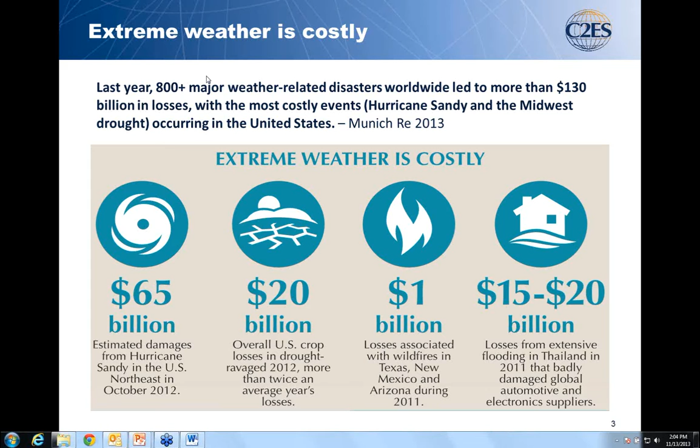The report, in addition to looking at what types of climate events cause a lot of problems, really tries to take the business perspective and answer the question: how do businesses perceive this risk, what are they doing to manage it, and are there opportunities they can seize by looking down the road at some of the impacts of climate change?

The report performs three types of analyses. One, a review of the global S&P 100 companies to look at any information they have publicly about climate risk and what they may be doing to manage it or seize opportunities. This information includes carbon disclosure project surveys, SEC 10K forms, and sustainability reports. In addition, we had more in-depth case studies with 6 companies, American Water being one of them, and held a workshop at the end of November 2012 to get companies' reactions and hear more directly from them.

If you haven't checked out the report, we have the website here on this page. I encourage you to do so.

Some other key findings: a lot of companies perceive risk as being important. 9 out of 10 of the 100 companies we looked at make some statements publicly that risk from climate and extreme weather is something they're worried about. However, a lot of them consider that risk to be managed within their normal business continuity plans—almost 3/4 gave that response in some form. A smaller portion are doing specific climate assessments, including future climate assessments, not just current climate, to think about their risk.

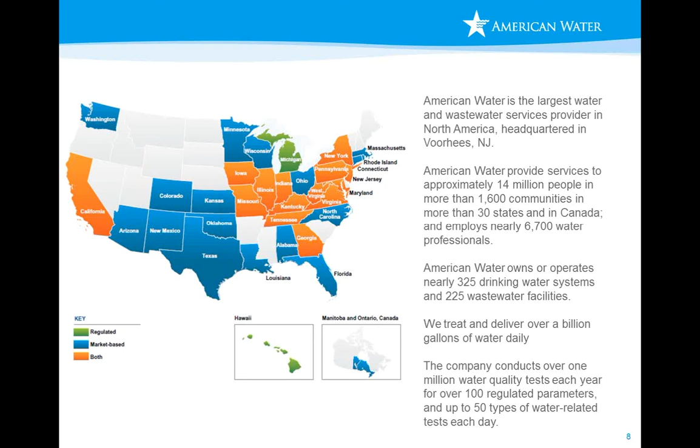From a climate standpoint, that poses a whole variety of different risks, and I'll show you a number of examples, from Superstorm Sandy to flooding in the Midwest and tornadoes. This isn't just a hypothetical or theoretical risk — it's very real for our company.

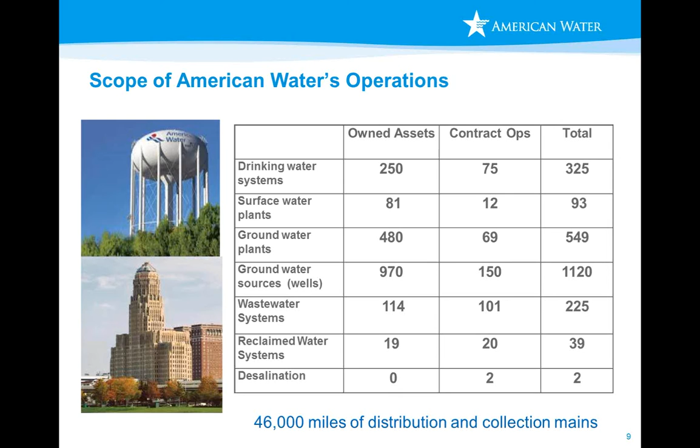We operate over 300 drinking water systems and 200 wastewater systems. We have over 1,000 wells. We also reclaim water, and we'll talk a little about the role of reclaimed water on climate change, as well as 2 desalination plants, and we're in the process of trying to build a 3rd. We'll touch a little on desalination.

A little bit on the outline of the presentation: I'll talk about climate change's effect on water utilities and some of the severe water events, and we'll touch on some of the adaptation that's already taken place. We'll end up talking about — and I'm not sure who to attribute this to, I've heard it in several different places — that in the end, climate change is really water change, and that's important.

I'll take a bit of a side trip around mitigation, and there's some discussion whether this is really appropriate. But I believe for a water utility — we're going to talk about water utilities being recipients of the effects of climate change, of drought, of flooding, yet they also have a role in contributing to that because they're large users of energy. So we'll talk about how we're managing energy and how that impact on water touches this water and energy nexus.

We'll talk mostly about adaptation — conservation, what we're doing on leak detection — but really get down to integrated water resource management. You'll see a number of different approaches towards climate resiliency, ending with the kind of program we use to assess our risks as a company.

This graph shows two things: the average water availability in the United States, and in the boxes, projected population growth. You can see that some of the areas of the highest growth rates, in the Southwest and in Florida, are also the areas where we're already seeing water stress.

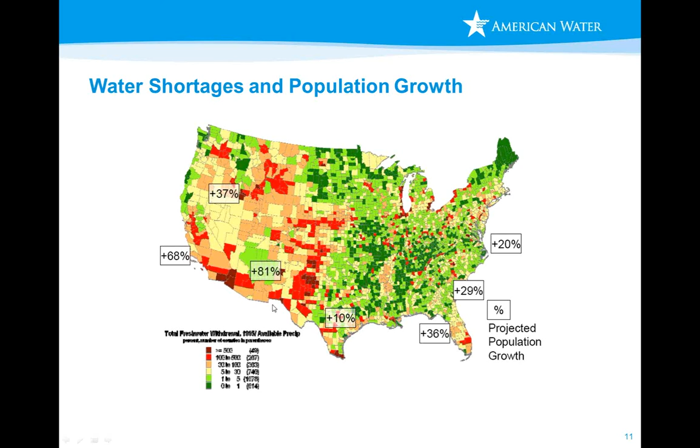But beyond those average water rainfalls, we really have to consider the variation in rainfall. As water utilities, we have to consider providing water services even when there's not an average year. We've seen in these graphs — the Southwest, Texas in particular — in 2011, and again in 2012, 60% of the counties in the United States were under drought conditions.

And again this year — this isn't just a bad year. Drought and water availability is a persistent problem for parts of the United States. So water utilities have to make plans on weathering the storm, as we may have to plan to weather floods or droughts for multiple years in a row.

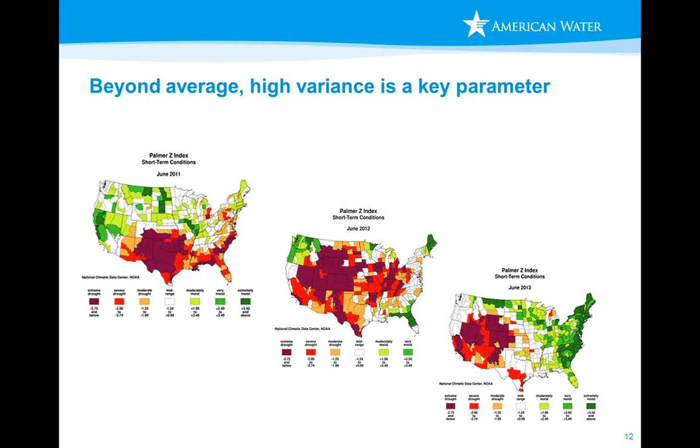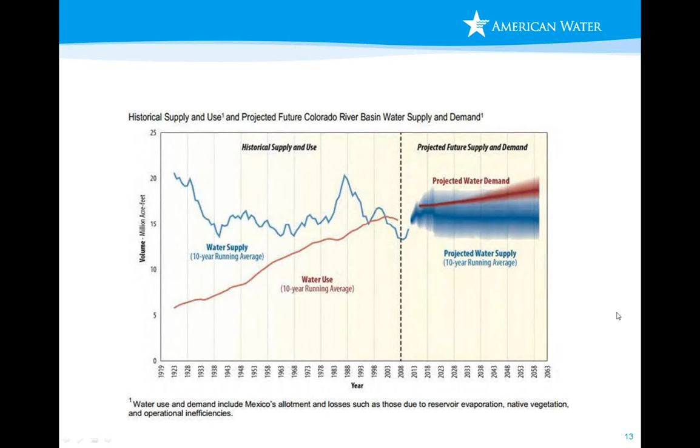We have a number of critical aquifers in New Jersey. Groundwater supplies as well as surface water supplies are increasingly becoming challenged.

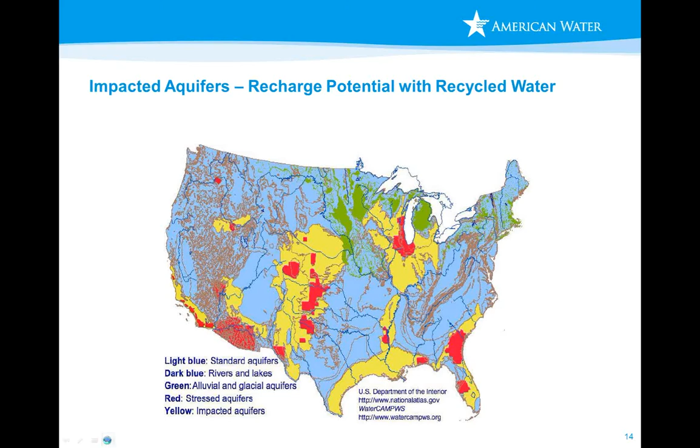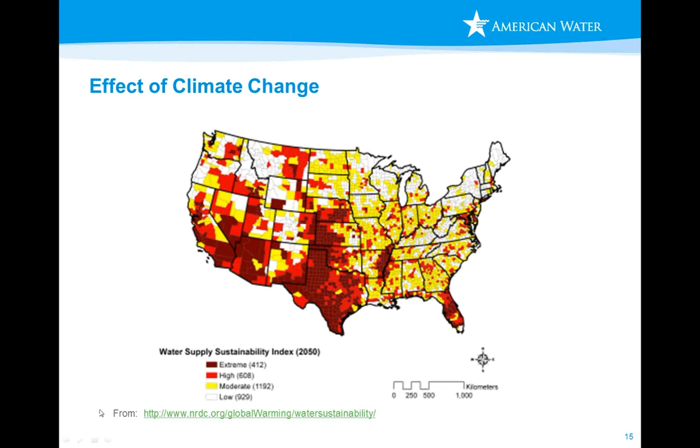Just in the last couple of years across American Water, we've experienced a number of extreme events: blizzards that shut down power supplies and threaten our ability to pump water, floods, droughts, storms, windstorms. My weather vocabulary has increased so much, from haboob to derecho windstorms to Superstorm Sandy, and we've gone from record drought to record flood in just a matter of 6 months.

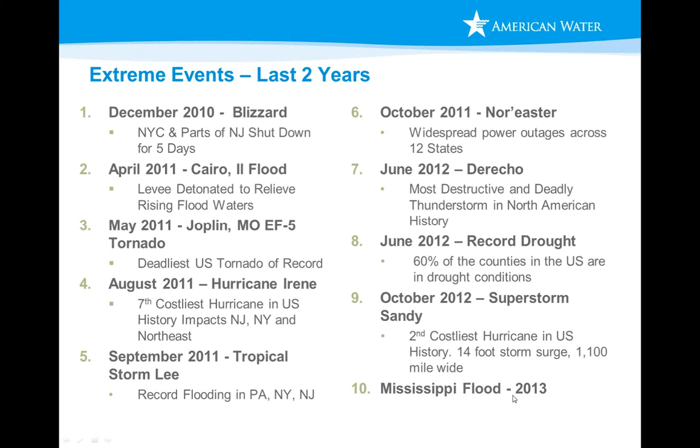Stepping back, my first experience with climate change and extreme events started in 1993 along the Mississippi River, where we had a treatment plant serving Alton, Illinois, just on the Illinois side north of St. Louis. This plant was along the river, and in '93 it was completely flooded, along with many other water utilities and wastewater systems up and down the Mississippi. Perhaps you remember Des Moines, Iowa was flooded for about a month before they got back into service.

Today we have a new treatment plant well up on the bluffs of the Mississippi, away from floodwaters, primarily driven by the fact that the old plant was in need of repairs and was constrained by having a railroad on one side and the flooding river on the other.

In more recent years, we had an effect from multiple storms: Hurricane Irene in August, followed by Tropical Storm Lee in September. This affected parts of Pennsylvania near Hershey. The previous record flood level was 16 feet, and the combination of these two storms resulted in flood levels 10 feet higher than previous records.

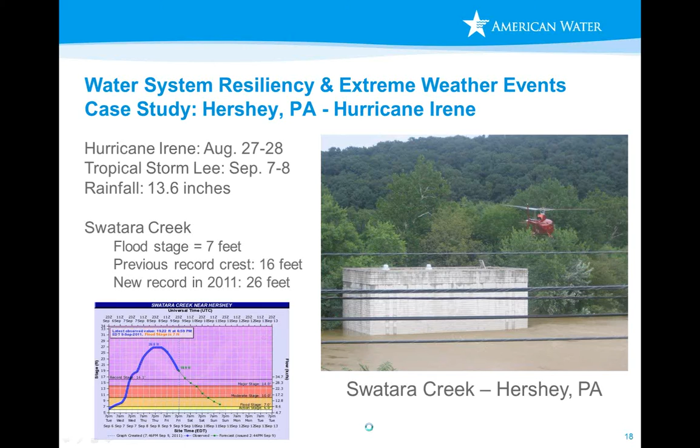The key was trying to find assets so we could disconnect houses no longer connected to the water system, shut down water in parts of the community affected by the tornado, so we could continue to provide service in other parts.

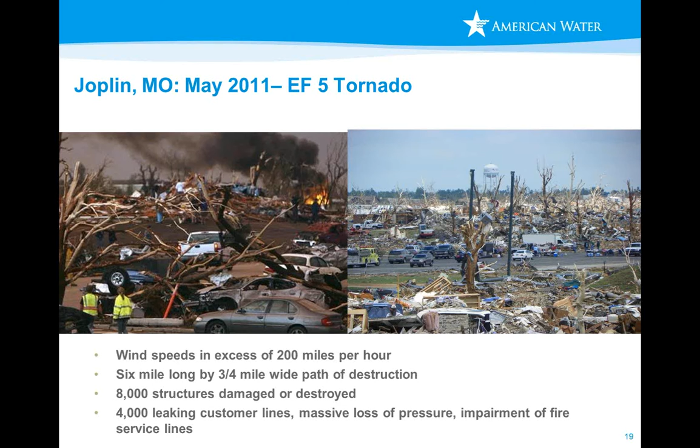But as we look at future weather challenges, we're actually looking to engineer this wall to be even higher.

And of course, Hurricane Sandy impacted the United States and some of the barrier islands we provide water service to. The ocean washed in and cut the island into multiple pieces, washing out roads, water and sewer lines, everything, such that parts of the community were completely devastated. Where we used to have water services, we now have water hydrants out in the middle of the ocean.

The key to our recovery was our recent investment in high accuracy GIS mapping of our assets, so we could go to a location covered with 3 or 4 feet of sand and accurately pinpoint exactly where a meter box was, so we could dig down and turn off the water to a house that no longer existed. It also allowed us to map the roads to allow crews to get in and begin rapid restoration of the community.

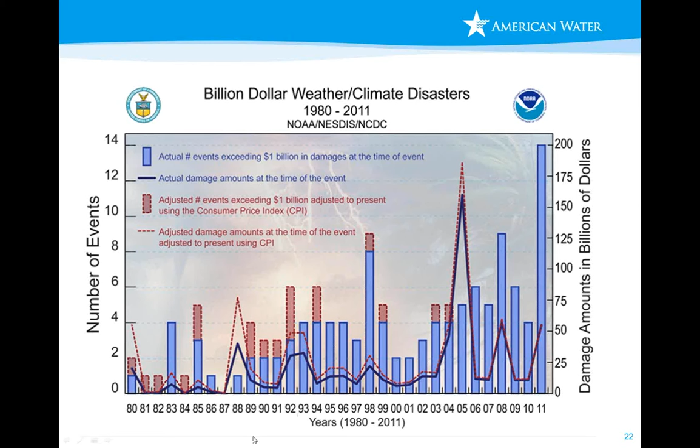The forecast for this, according to the National Association of Clean Water Agencies, is through 2050 another $500 billion in need for investment in climate adaptation costs for water systems. This comes on top of an already $1 trillion forecast over the next 20 years to improve water and wastewater infrastructure and upgrade aging facilities.

When we combine these two, there's tremendous pressure on water infrastructure, not only from aging assets but also from the challenges posed by climate change. The key to this is smart investment, such that investments made on aging infrastructure also make facilities more resilient to climate change.

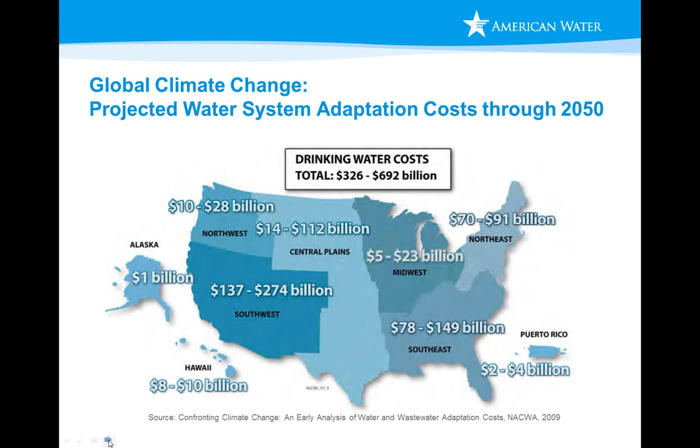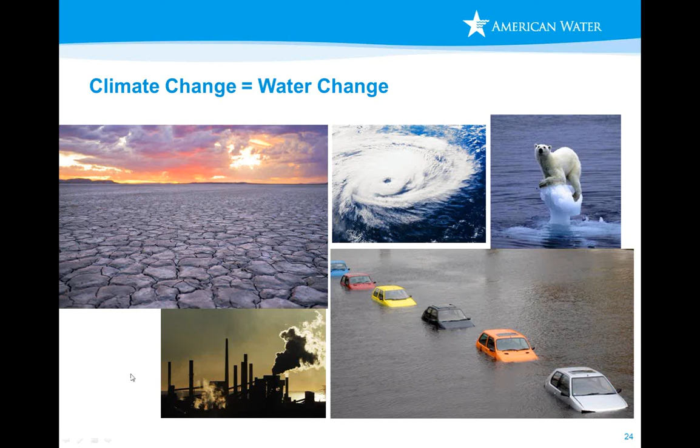By having that snowpack in the mountains, with a delay in melting, it essentially acts as a water reservoir. There are changing patterns in that, leading to flooding and pollution—not only of greenhouse gases, but pollution related to water supplies. That's really the idea here for this next slide.

One impact of climate change is water quality changes, and even when water is available, quality changes may make it unsuitable for drinking water. For example, forecasts around algal blooms due to high nutrient runoff from storm events, or reduced flow caused by droughts or higher temperatures, result in blooms of algal cells.

Even more concerning is that some of these algal cells can create toxins—neurotoxins that affect the brain and nervous system, and hepatotoxins that affect the liver.

There's increasing concern from a public health standpoint around climate change regarding these compounds being present in water, as well as clogging of water filters and changes in algal blooms that alter organic carbon levels, which could create disinfection byproducts posing health risks and promote bacterial growth in water supplies.

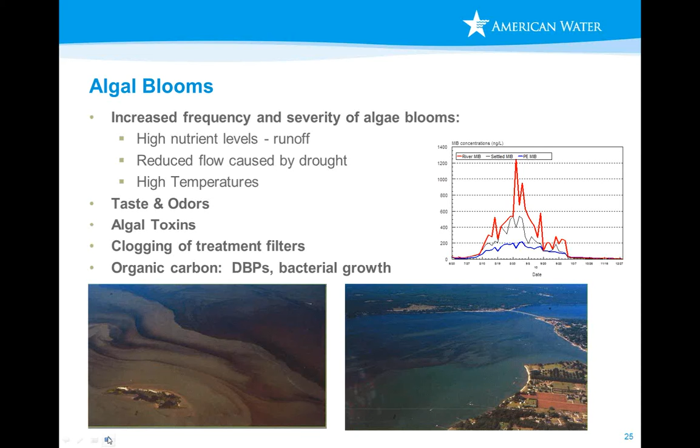So the rainfall that occurred 7 days ago has been shifted to align with the bacterial patterns occurring now. You can see that in many cases these peaks overlap with each other—so a rainfall event 7 days ago can be traced to the occurrence of bacteria in water supplies today.

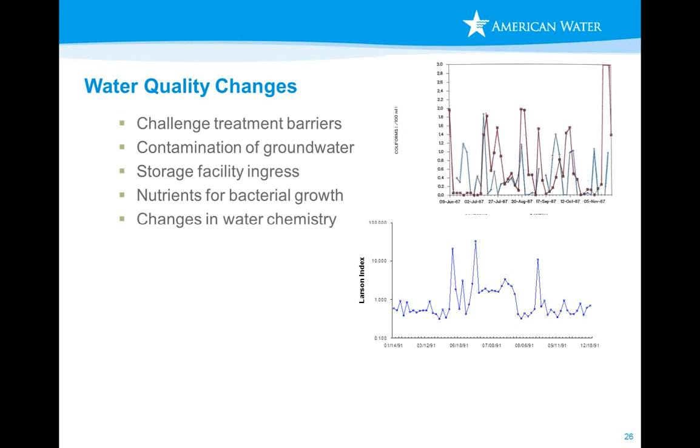So water quality changes and the potential for overwhelming treatment barriers are a very real concern for water utilities as we see these changing water patterns.

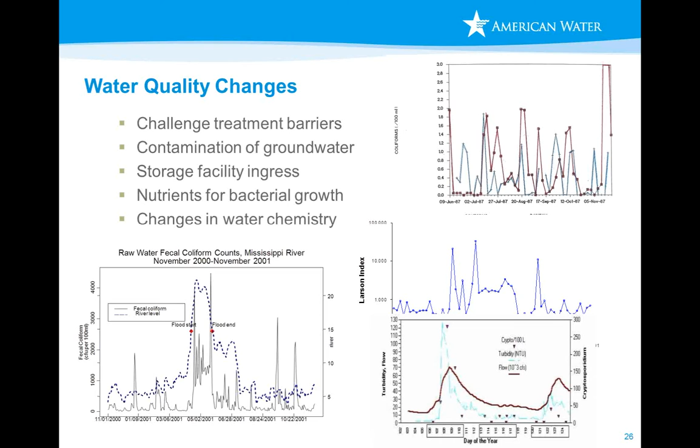It's not just that utilities are recipients of this, but water and wastewater utilities use about 4% of the nation's energy, contributing to greenhouse gases. In some parts of the country, like California, it's much higher, approaching 20%.

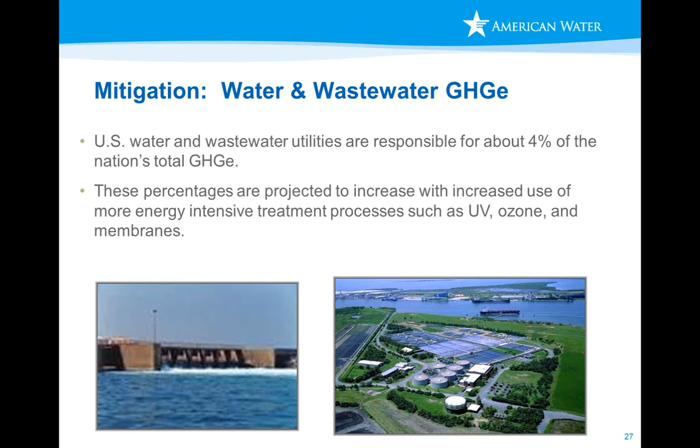Where do utilities use all this energy? It's in the pumps, either pumping the treated water to your house. A family of 4 uses about 250 gallons, and at 8 pounds a gallon, that's about a ton of water that we deliver to your house every day. But also for groundwater systems, as we see dropping groundwater levels due to climate change, there's an increase in costs of pumping.

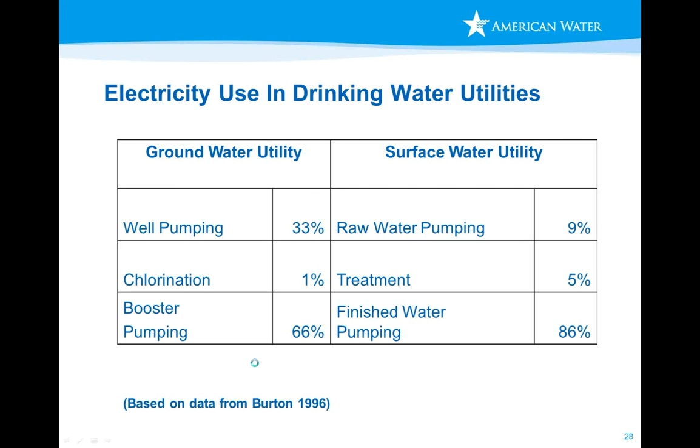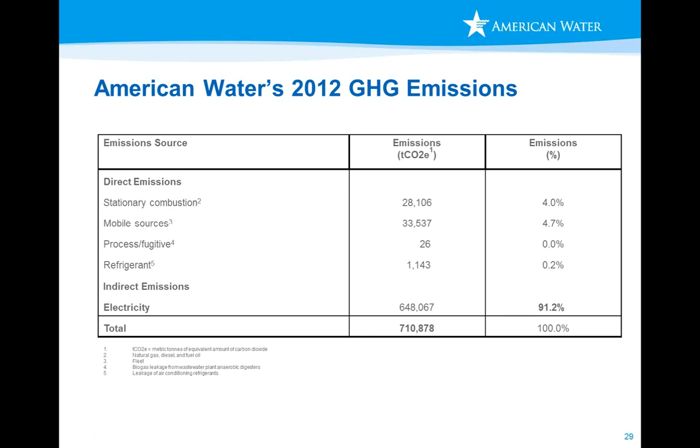For American Water, our carbon footprint is very much related to this: 91% of our greenhouse gas emissions come from indirect emissions through use of electricity, and over 90% of that electricity use is in pumping. Even though we've had success in reducing our greenhouse gas emissions since our baseline in 2007, when we look at the intensity of those emissions, we still have an opportunity for improvement.

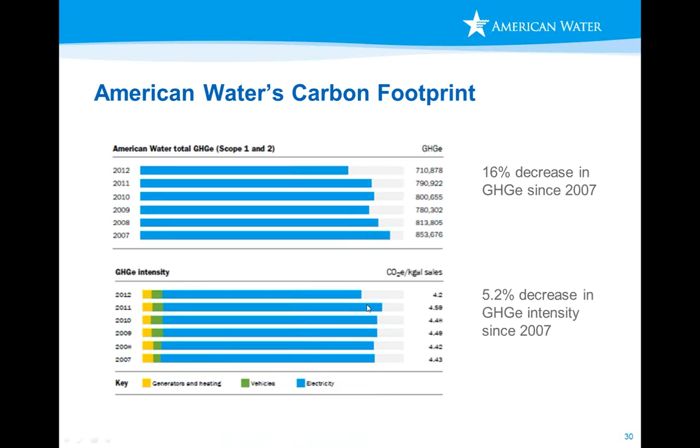I used to joke that we're trying to change all of these factors: by conservation and reducing leakage, reduce the amount of water we have to pump; change the weight of water by dissolving helium in it to make it lighter, which is actually a joke, but helium can be used as a way to look for leaking pipes. We can also reduce the pressure we pump at, and improve the pump efficiency.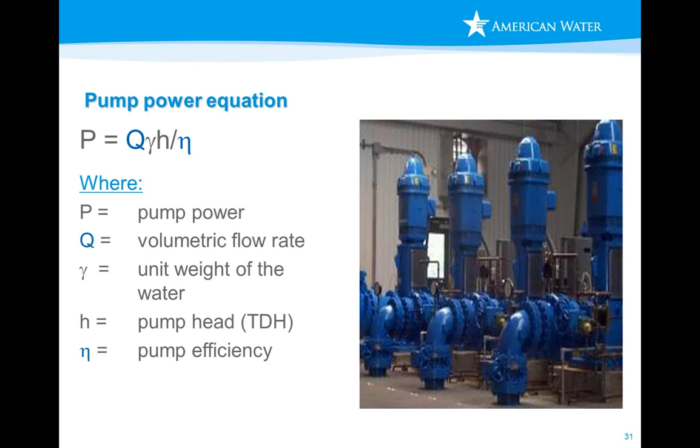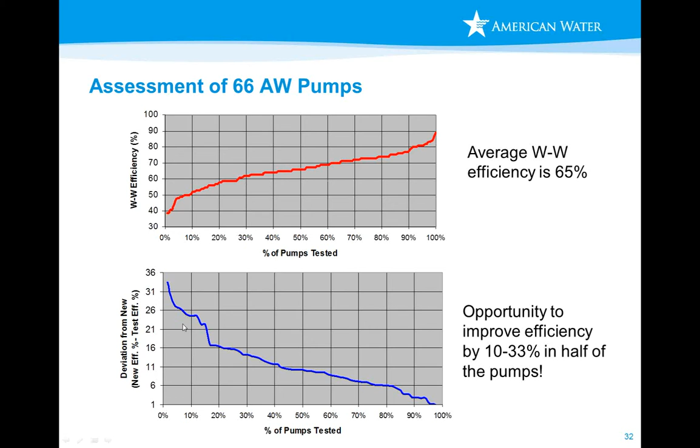We've been monitoring the efficiency of our pumps. On average, they're about 65% efficient, but you can see a number of our pumps in our inventory have lots of opportunity to improve that efficiency by 10 to 33%.

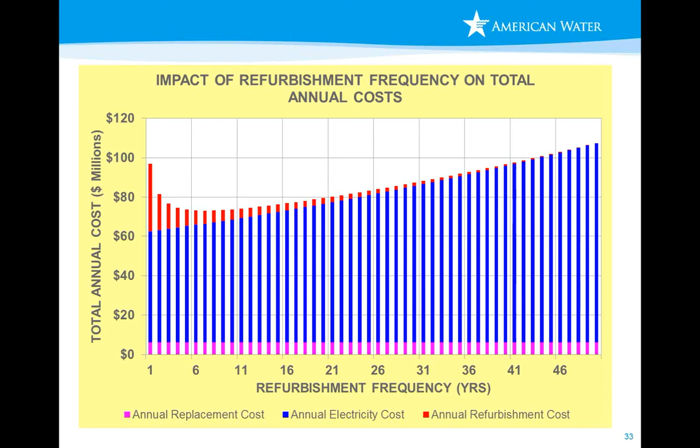When we look at the rate of refurbishment of pumps, we find an optimal rate of refurbishment on about a 10-year basis. So it's not only replacing our pumps, which is a long-term capital investment, but also being very aggressive and focusing on our day-to-day operations.

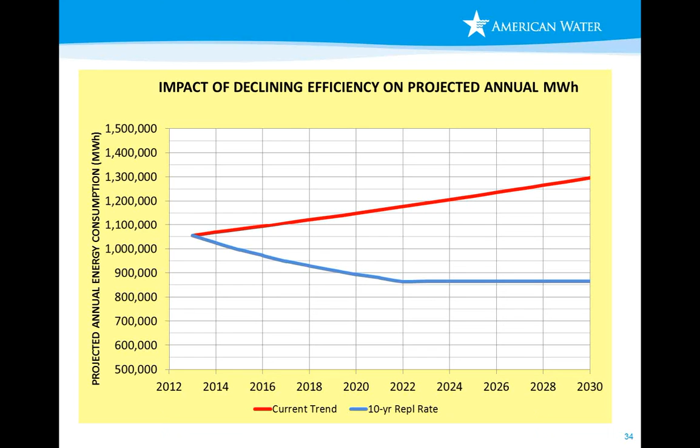Absent that kind of pump refurbishment program, we would project that our greenhouse gases would continue to grow as the pumps continue to reduce their efficiencies. But with our program focusing on pump efficiency, we project that we can improve our greenhouse gas emissions both on the conservation end and the pump efficiency end.

Of course, we can explore alternative energy options like solar and wind. Next year, we're going to more than double our use of wind power and bioenergy. We operate all of this, but still today, it's only about 1% of our energy portfolio.

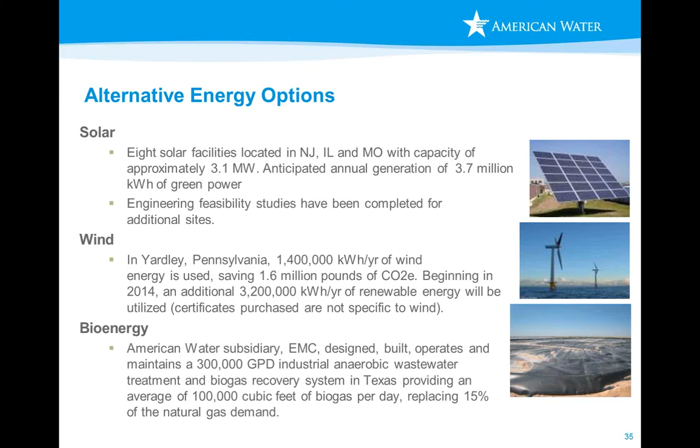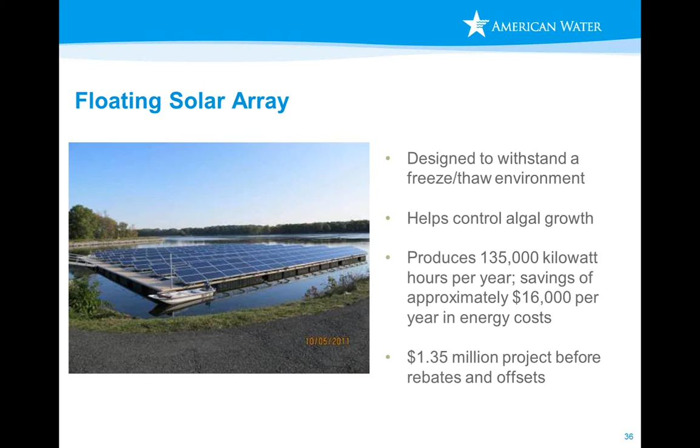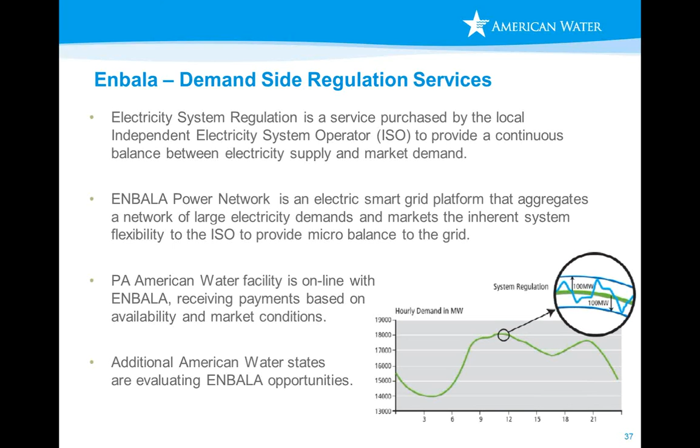So we're looking for opportunities where the intersection of energy and water can actually be beneficial. One other thing we're working on is demand-side regulation with a company called Enbala from Canada, which provides smart grid demand management. It's real-time, second-by-second management of the electric grid where we can speed up or slow down our pumps. The result of that pilot is shown here next.

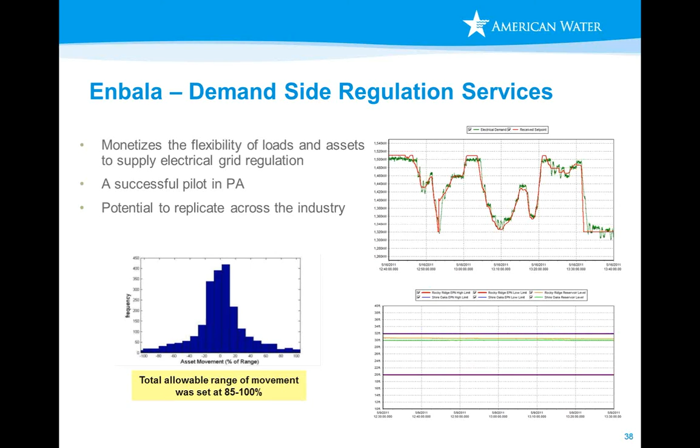Although this doesn't necessarily result in greenhouse gas reductions, since we're just shifting energy use, it does prevent having to bring on emergency or standby energy, which may not be as efficient as your everyday power provider.

Going back to the pump equation, another way to conserve energy and provide additional water resources is focusing on leaking infrastructure. It's estimated that about 7 billion gallons of water leak out of drinking water pipes each day, representing about 16% of total daily drinking water production. So we could have 16% more water available by focusing on leak reduction.

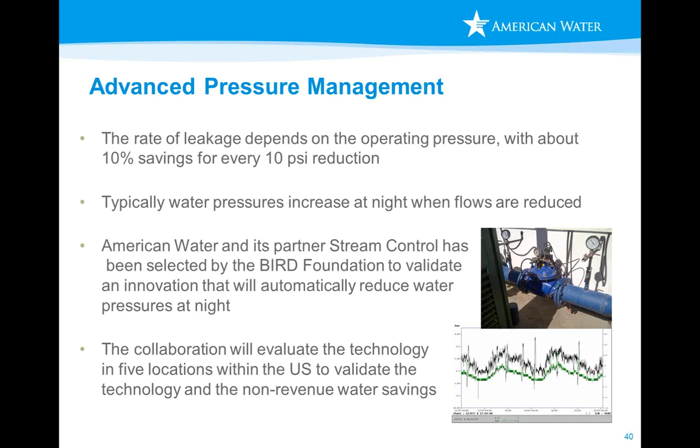Another approach around that pump equation is pressure management. Earlier this year, we were awarded a grant from the Bird Foundation, an agency set up by the U.S. State Department and the Israeli government to foster technology transfer. This was for technology involving electronics that, when we use less water, like in the middle of the night when everyone's asleep, sense that most pressure in water systems actually goes up because people aren't using water. This unit senses that reduction in flow and actually reduces the pressure in the system. Why have so much pressure when people aren't using it? We expect this to also help reduce leakage and main breaks in the water system.

Conservation is another way to reduce the amount of water we have to pump and provide energy for. Programs differ in different states; California, our state, is one of the most advanced, providing audits to homes and commercial buildings, rebate programs to use less water, education in schools, and public information about the importance of water conservation. We became a partner with the U.S. EPA WaterSense program to provide community education, particularly around Fix a Leak Week - try saying that fast 10 times - to make customers aware that leakage in their house could result in about 20% loss of efficiency in their water supply.

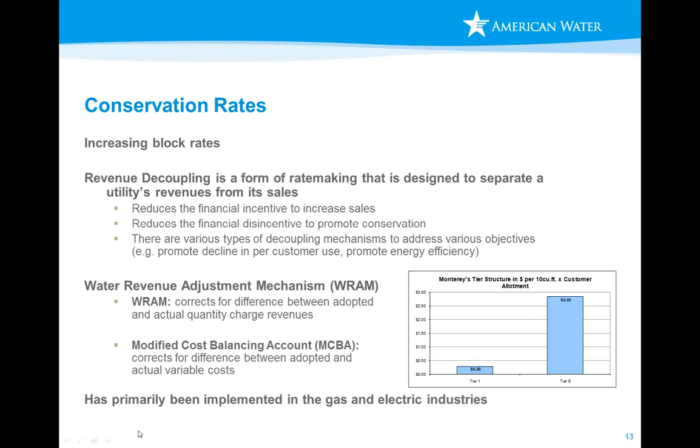And of course, one other way to drive conservation and water savings—I'm talking about all of these on mitigation, but they clearly cross over on the adaptation side, because using less water extends the usage of what we have, particularly groundwater or reservoirs. This isn't something an investor-owned utility can do alone; we work with public utility commissions on increasing block rates or revenue decoupling, like the revenue adjustment mechanisms we have in California, where we decouple water from rates and periodically do a cost balancing account. This has been primarily implemented in gas and electric utilities, but is still somewhat novel on the water side.

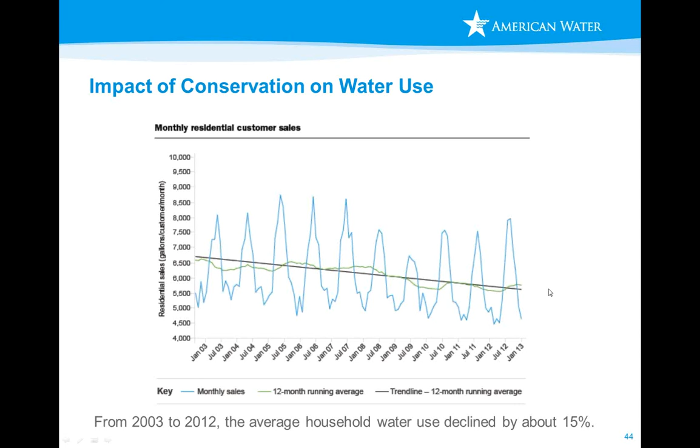So let's move into the impact of all these effects: a 6 to 15% reduction in water use over the last 10 years, and that's getting us in the right direction.

Let's move into the discussion around adaptation, which is really having an integrated approach to water supply. For us, it means looking at all the different water resources and matching them to the needs of the community in the best way—not only investments in technologies like water reuse and stormwater capture, but also programs like demand-side management, community education, and outreach.

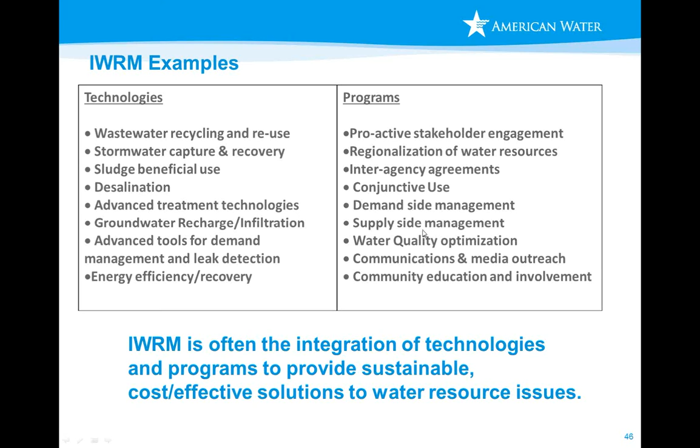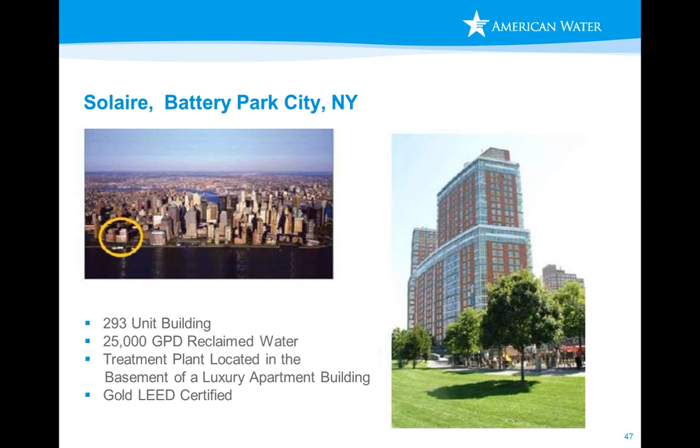One good example, shown here in New York City, is an apartment building called Solaire, where in the basement we have a wastewater treatment plant that collects all the wastewater from the building, treats it, and recycles it back through the building. It's designed to treat 25,000 gallons per day for toilet flushing, makeup of cooling water, and landscape irrigation.

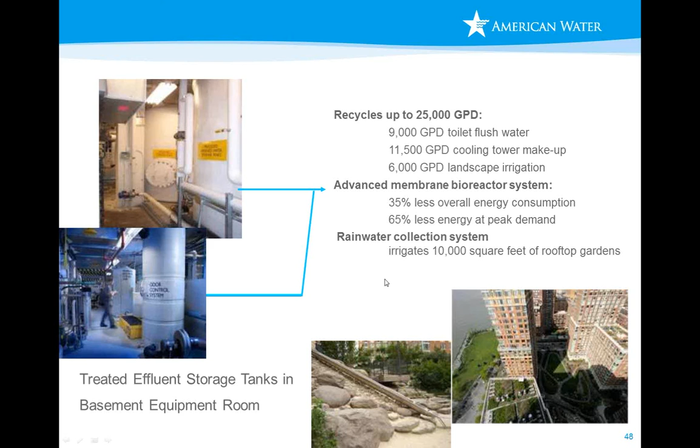Other approaches to water management include rainwater collection systems. But the effect of this reclaimed water system is to reduce the water footprint of this building by 50%. Using reclaimed water here is not only a benefit to the people in the building, but a benefit to the entire water system because they're using less drinking water, and also a benefit to the wastewater system because they're putting less wastewater into the collection system, which is a problem for New York City.

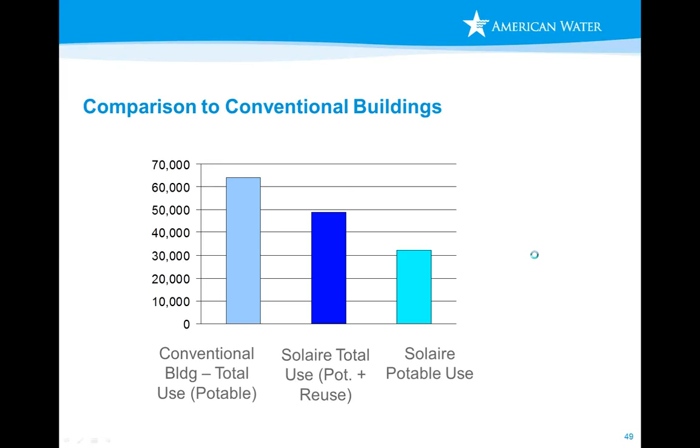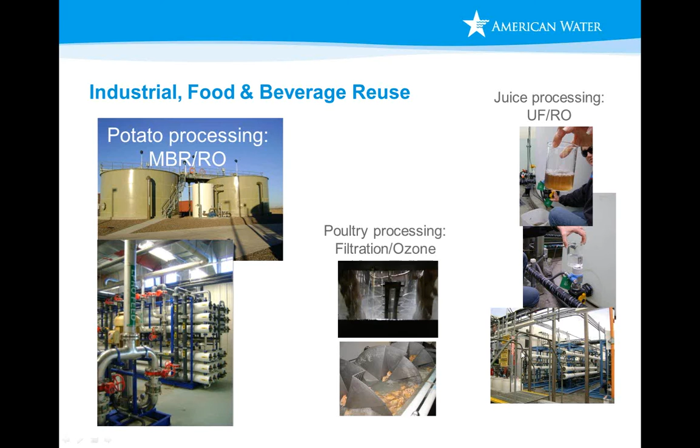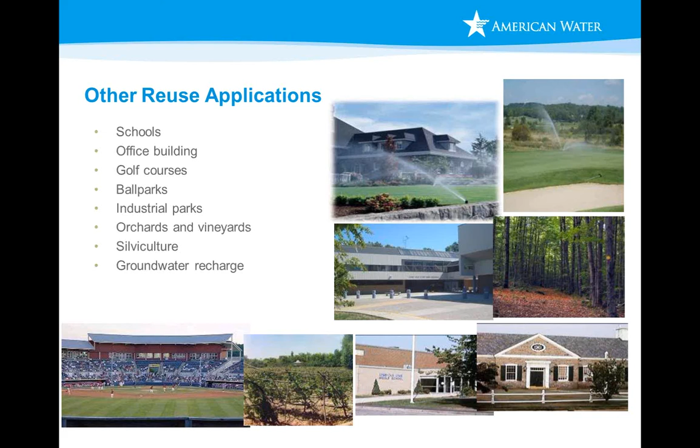Reclaimed water can be used in many other applications. We have examples where we're using it for schools, which makes a great program for educating kids, office buildings, ballparks, and you can see the list here. Obviously, golf courses—many golf courses today use reclaimed wastewater.

One advantage of these technologies is they can produce high-quality treated wastewater that can be used for beneficial purposes. One downside is that the technology using membranes tends to be more energy intensive, so we've been researching new wastewater technologies that use less energy—we call this NPXpress. It produces lower levels of nitrogen and phosphorus with less energy.

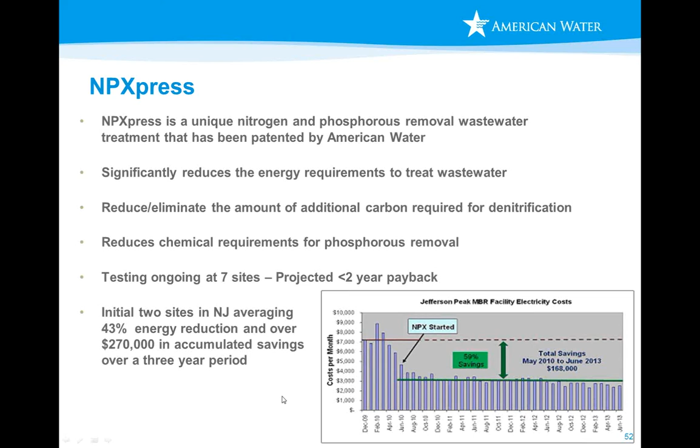One example is a pilot system we've had in New Jersey, which has reduced its energy utilization by 59%, while treating the water even better for reducing nitrogen and phosphorus—important nutrients that could lead to algal blooms and contamination.

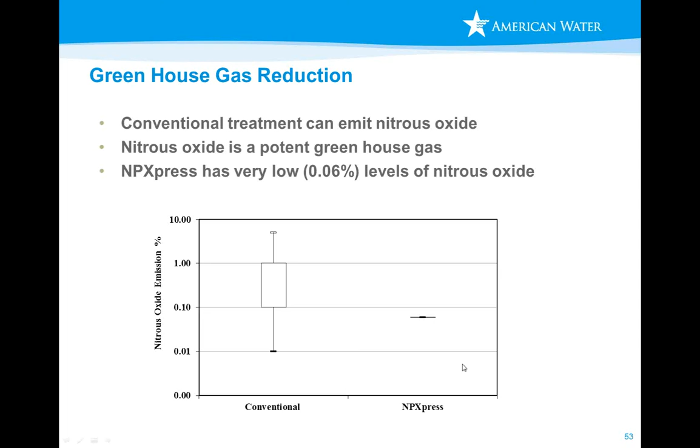Not only that, but this technology results in lower greenhouse gas emissions. Some of the nitrogen present in conventional wastewater plants could result in producing nitrous oxide—you might remember that as laughing gas, but from a climate standpoint it's not a laughing matter, because it's 320 times more potent a greenhouse gas than CO2. Having technologies that reduce energy use and reduce nitrous oxide emissions is really a key element for future wastewater plants.

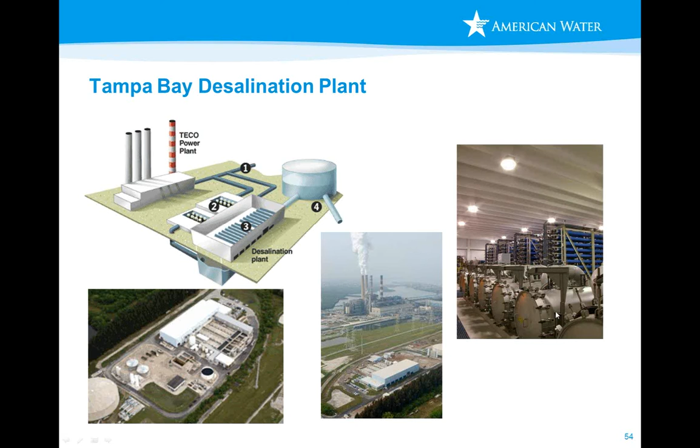I just have a few minutes to wrap up around our risk resiliency. We think that risk is the likelihood and vulnerability and consequence, and our resilience is our ability to recover from those kinds of risks by managing the duration and severity.

We really think about our climate resiliency strategy in four different categories. One, about hardening assets, like the example I showed you, building flood walls or having emergency power or moving plants out of the floodplains, but those are very expensive processes. Others would be diversifying facilities, having multiple sources of water, multiple treatment plants providing water to a city, so that even if one was impacted by climate change, we wouldn't lose the water supply altogether. Or having a combination of surface and ground, or desalination, like I just mentioned. Also, other asset-light solutions, like having emergency interconnections with other water systems, so even if we lost a pumping station, even a whole water treatment plant, we could get water from a nearby community. One, about blind flanges, so we could immediately come up and quickly hook in emergency power, emergency interconnects, and provide water from emergency supplies and portable generators, as well as having robust emergency planning.

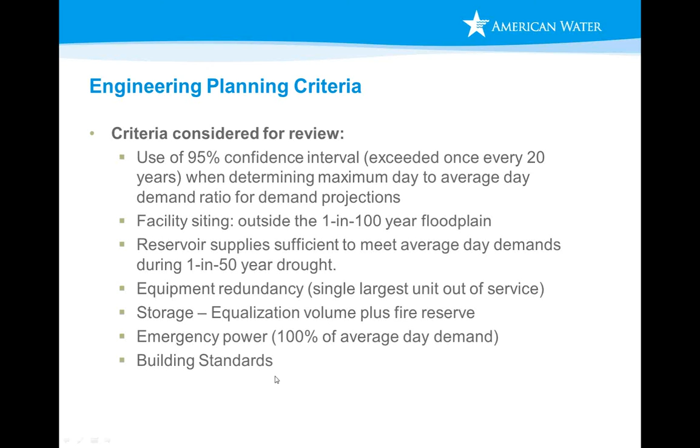So in our planning criteria, we are considering criteria around climate resiliency, and this hasn't existed in the water industry before. So what are we going to build and design plants to be able to operate under demand projections for water in floodplains, and under what kind of conditions for droughts, and with certain pieces of equipment that might be affected, that may be out of service due to the climate, or the amount of storage we have in the system, as well as standby emergency power, and even building standards that I showed you for some of our buildings.

And so our process is starting to go on defining our critical assets. Many of our facilities are in areas that are environmentally sensitive by its nature, into water supplies, by rivers or lakes or reservoirs, defining those critical assets into different tiers of importance, and assigning the hazard pairing to different kinds of hazards. And then using a variety of different risk analysis.

So just to wrap up, climate change really ends up being water change for water utilities, and it poses a number of challenges to our engineering and operations, considering a variety of different factors, both long-term and short-term imperatives. Utilities are putting assets into the ground today, expecting those assets to be in service 100 years from now, so water utilities have to have that long-term look. Having rapid response to extreme weather, and I showed you a number of different examples where we're looking at innovations on leak detection, on efficient wastewater processes, demand management with electric grids, where there's clearly opportunities for technology and innovation.

So Joe, turn that back to you. We can go to our question and answer period.